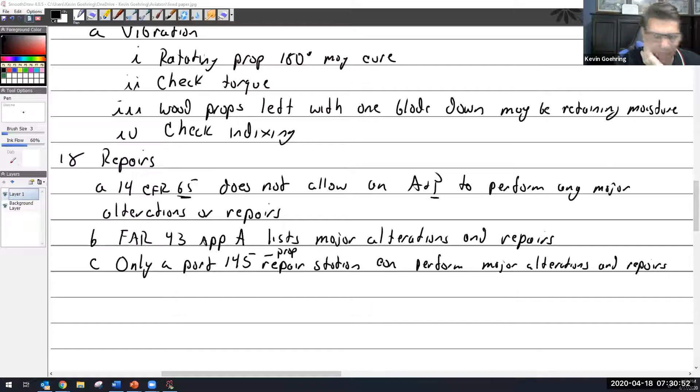Let's see. Oh, so only a Part 145 prop repair station can perform major alterations and repairs to props. I think these are some of the Q&A questions that'll help you out.

So wash props. Wash the prop with fresh water after salt spray exposure. Wash prop with fresh water after salt spray exposure. That's if you're buzzing people on the beach or happen to have a seaplane. Wash with mild soap and water before inspection.

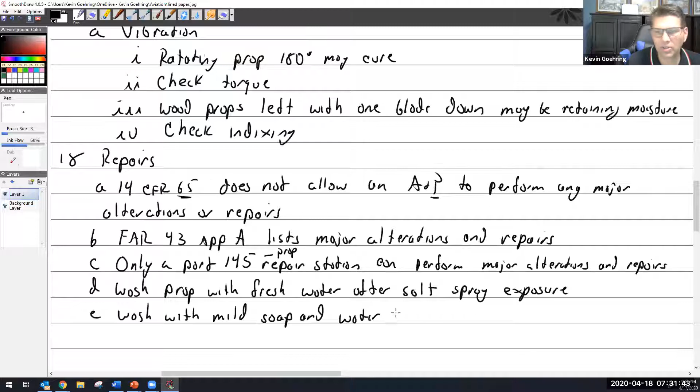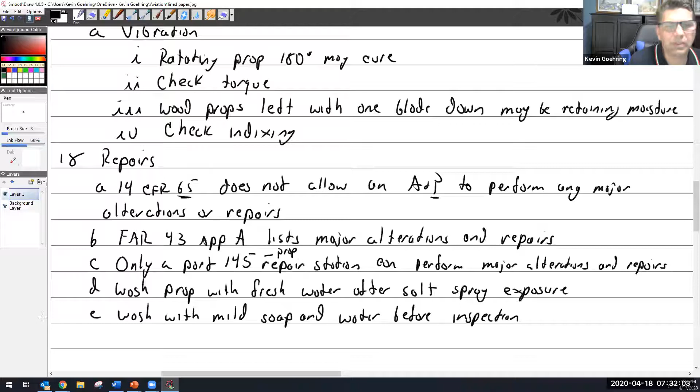I don't want to get too crazy here with my notes, which I did when I wrote them. So sometimes I spend longer trying to figure out what not to say rather than just saying it. Oh, I should have said that.

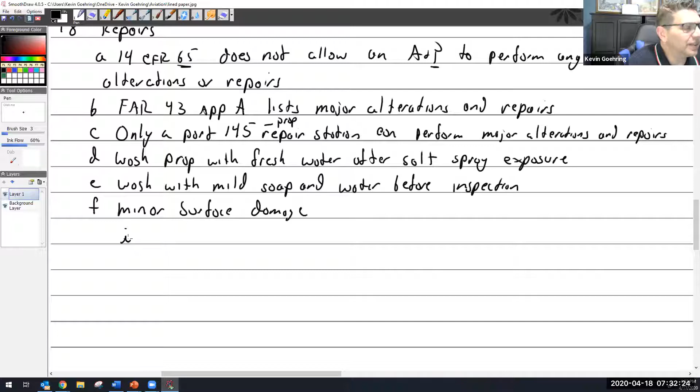So minor surface damage, minor surface. All right, so what is common with propellers is the leading edge of them gets pitted, you know, from bugs and all kind of rain and little tiny rocks and stuff like that. So it's actually considered rather normal and routine maintenance for A&Ps to take a small file and redress the entire leading edge, file the whole leading edge. You have to be careful not to change the profile, but you're allowed to do that. And then take some sandpaper and polish it and then repaint it.

Funny thing, you'll see a lot of airplanes out there that have really beautifully polished propellers. And a couple of years ago, it just seemed like that was the big thing. The FAA was coming after everybody who had a polished prop. Apparently, there's only one propeller in existence, and I don't know which one that is, that actually has in its repair manual that you can polish it. All other repair manuals clearly state to paint the propeller after the repair. So you have to have them painted. You're not supposed to have them polished. So just keep that in mind.

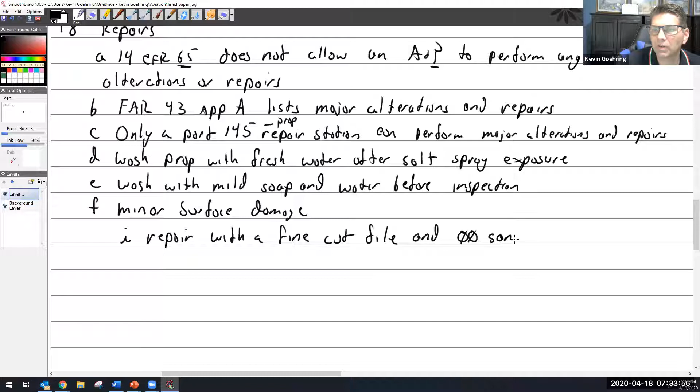Repair minor surface damage, repair with a fine cut file. Let me see, repair with a fine cut file, and double aught sandpaper or crocus cloth. Double aught sandpaper or crocus cloth.

What's a crocus cloth? I knew somebody was going to ask that. It's like sandpaper. What's the difference between sandpaper and crocus cloth? It's got to do with the abrasives that they use on it. And offhand, I don't remember what it is. Just use some sandpaper.

What's that? Sorry, Kev. I was going to say, how do you spell crocus cloth? Crocus, C-R-O-C-U-S. Thank you. I thought you said Irocus. So I was like, what? No, crocus. C-R-O-C-U-S. Crocus.

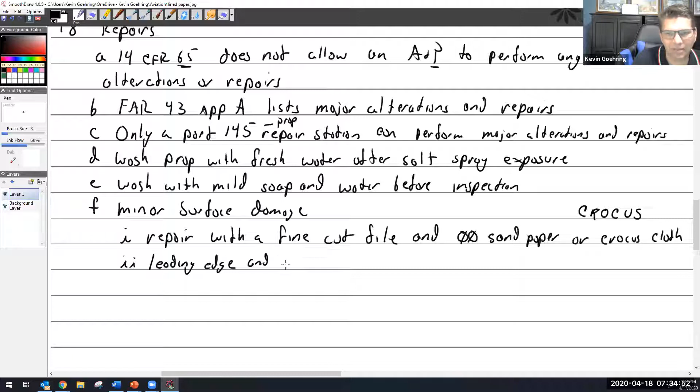Okay, leading and, not to as much of an extent, trailing edges often need to be dressed. That's what you call it, when you take a file and you go down the entire length of the blade and pull out those microscopic little imperfections, because those little microscopic imperfections, that's where your stress risers start. And that's where you're going to get a crack in your propeller.

Dress with the crocus cloth? Yep. Well, I take a file, I think I've done this to my prop almost every annual, especially if it needs a little touch-up paint anyway. So I'll take a file and just draw it down the entire length of the prop. And I use my little jeweler's files. I don't use a giant file and take off a bunch.

But then I'll just dress it all the way down, and I'm taking out the very minor little dents and scratches and nicks that are in the prop. They're almost microscopic. You can't see them. But if you take your fingernail and run it across there, you can feel that it's not real smooth. And so then I'll smooth it all out and then do a sand, and then I'll paint it.

No repairs. So let me see. MJ says, so filing and redressing is not a major alteration or repair? No, it's definitely not an alteration, and it's not a major repair. It's minor. So no repairs are allowed in the shank. No repairs are allowed in the shank, in the shank of adjustable prop blades.

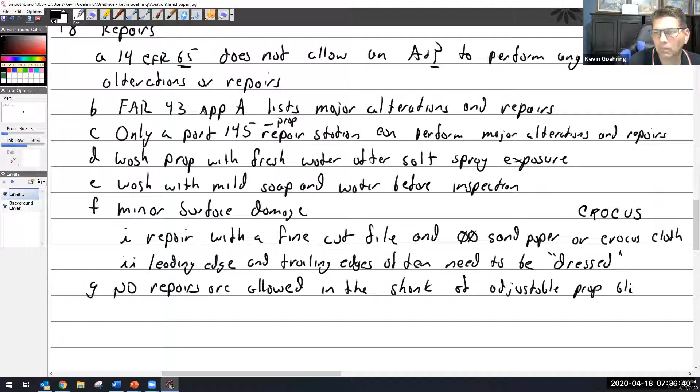I'm not sure how I feel about this statement, but transverse cracks, which is across the blade, are usually cause for rejection. All right, outside of composite blades, I don't know of any cracks that aren't cause for rejection. They are. You have a cracked blade, I'm sorry, that thing's coming off. And I think there's some Q&As about this, prop bolt holes.

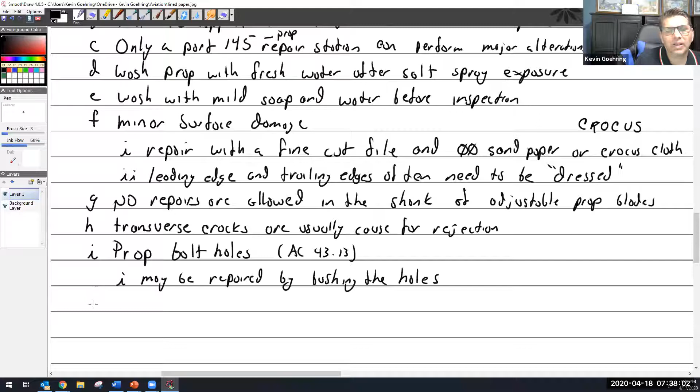They can be repaired according to AC 43.13, which again is acceptable methods, practices, and techniques. So prop bolt holes can be repaired. May be repaired by bushing the holes. And sadly, if that's happening, it's usually on account of bad maintenance. May be repaired by bushing the holes, or using 1/16 inch larger bolts.

And then this last statement is bolt hole repairs to wood props are not allowed. So bolt hole repairs to wood props is not allowed. Okay, I'm gonna tell you right now, I'm not doing any of this. Hey, no way, no how.

So when I think this through, if I've had a propeller that somehow has damaged bolt holes where the prop mounts to the flange, and either the bushings from the flange go into the prop, or it's just prop bolts in general. And I think, okay, AC 43.13 says if those holes are bad, then I can just drill out the prop, bush the holes. No way am I doing that. Or two, maybe drilling the holes out a little bit bigger and using a 16th inch larger bolt.

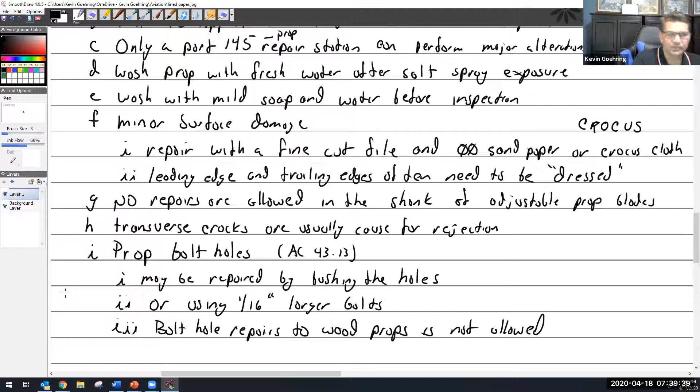Well, that means I got to also do that to the flange of the crankshaft, and that is not approved. So I don't know. Well, it says that. I'm being really cautious about that one. There's too much liability. It's too much liability. I don't know. Some of this is kind of weird.

You're allowed to. It's something you can send out to have done, and this is actually pretty common. Shortening blades, but it stands to reason if you shorten one blade, shorten the other side, and that's actually kind of a common occurrence. That is a major repair. Might even be an alteration.

And the reason why it's done is if you damage the blade, you get a bad enough rock chip, a crack happens, then rather than throw away the whole propeller, you actually shorten the blade if you're allowed to. You just got to make sure you do the other side too.

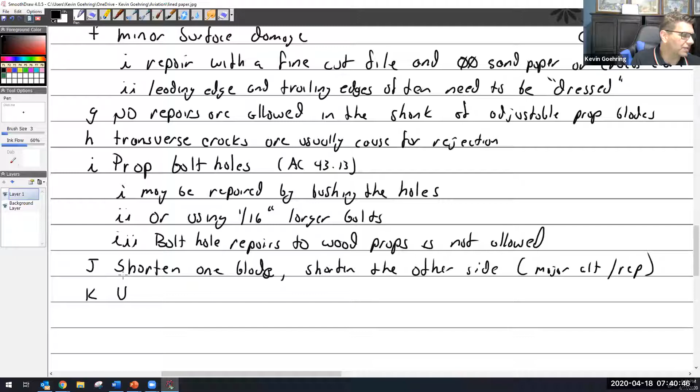Something that it's sad, and it shouldn't be this way, but it's overlooked. And as mechanics, we should be doing this all of the time. In my shop, every time something came in for an annual, it was one of the things that we addressed and would write down as either a discrepancy, airworthy or a discrepancy. We highly recommend it. And that was repainting of props. They're expensive and you want to protect them, and it's the paint that protects them.

And so especially the back, which is the face, especially the face where the flat black is, the flat black is not a very robust paint. The front, you can buy propeller epoxy paint in a can from Tempest, I think is a brand name. They make it, and we've got it even in the tool room at school. But the back is usually just a flat black. And so it's a lacquer or something. It doesn't last very long.

So it's almost a good idea annually to sand down the back of the blade with a little bit of sandpaper and just give it a coat or two of black paint, and then fix anything on the prop that is missing some paint. But use caution. I say paint often, but use caution when adding finish, which is either paint or varnish, to prevent imbalance.

Yes, Stephen. I've noticed on a lot of props, it's not black on the back, but it's like a metallic gray. Well, when you say the back, you mean the face or the back? The face. So the part facing the users, which is the face, which is the back. So the part the pilot sees? Yes, the face. Sorry, now you got me going. So yes, the part the pilot sees, which is the face. It's supposed to be flat black. It's the only approved color I'm aware of.

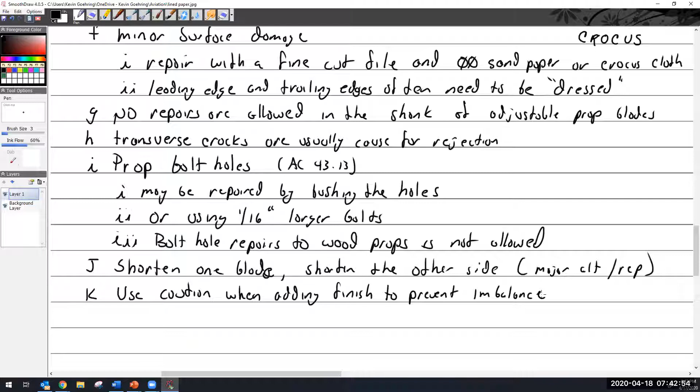Hey, Kevin. When you do the face, did you have to mask the other side? I do, yeah. First of all, I don't want to get flat black all over my airplane, so I put blankets and stuff on the cowling, take off the spinner, and then yes, I do mask it off, so I don't get the flat black onto the back of the prop, which is the rounded part.

And I kind of already said this: polish out scratches with fine sandpaper.

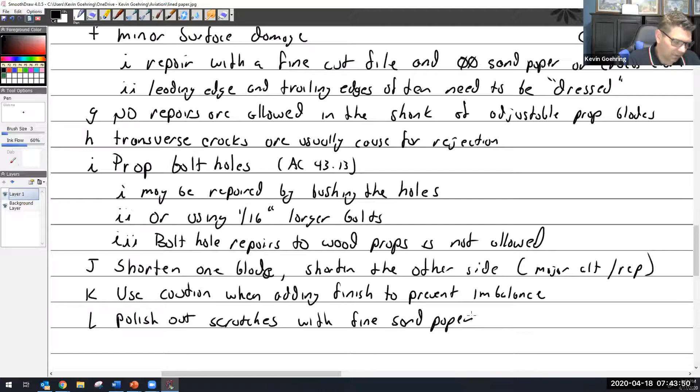All right, I'm going to make this one either very, very simple or very, very complicated. So I have an entire page here that I'm not going to go over, but I'm going to say repair of rock chips, damage, scratches. And so I had this entire thing here, which came out of AC 43.13. Let me see.

Actually, it dealt with bent blades and all kinds of stuff with that, and what the limits are. And it got crazy. Sometimes I think that a little bit of knowledge is great, so I'll just go with it. So I got into this slide and I explained how to use it, where you can repair the blades, what the bend radius is if a blade got bent, how you can fix it, and what station it could be. And I explained all how to use this.

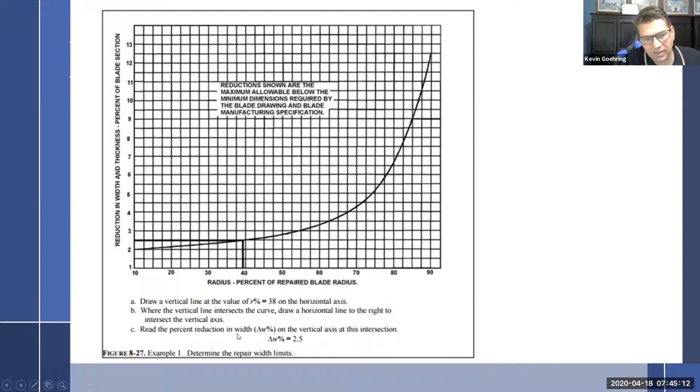And that goes on for a page and a half. And I decided, you know what? I'm not going to do that anymore because it's ridiculous. If you have a bent blade, my gosh, don't be trying to straighten it. That's something a repair station should be doing. So I'm not going to do that. And I'm assuming if you work at one of those repair stations, they're going to train you how to do it.

Secondly, I'm going to bet you a large lunch at a drive-through, supersize included, that they're not using AC 43.13 to do any of this. They are using the actual repair manuals from the manufacturer. So I'm just going to say this: use the correct manual. Actually, it's repair. I shouldn't even say rock chips. It was all about bending and all kinds of stuff. But rock chips is something we do as mechanics. So repair rock chips, use the correct manual.

Some manuals have one thing, some have another. In my notes, I wrote a quick note about repair dimensions. You have a blade, and you have a rock chip. Of course, this is magnified 100,000 times. You're going to find out that you have to measure the width of this, measure the width of that.

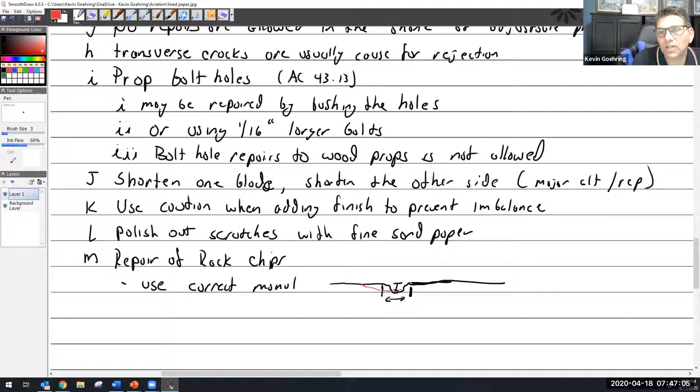And then based upon the depth, width and depth, you're going to figure out the ratio of the repair. There's an actual ratio of repair that tells you when it's done, it has to be like that. The reason is you can't take a propeller blade that has had damage like that and say, okay, we know we don't want a stress riser, and everything has to be nice and smooth, therefore you smooth it out and it looks like this, right?

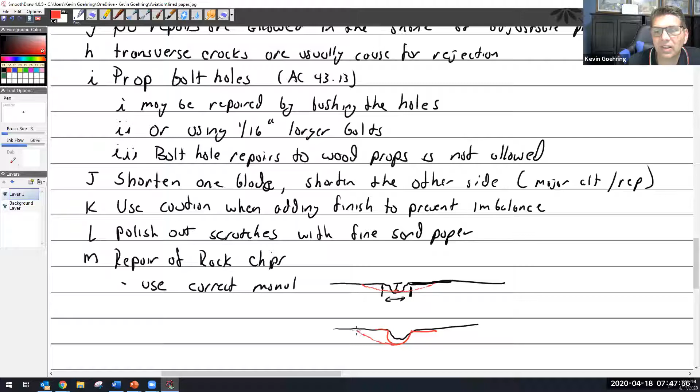Yes, you have smoothed it out, but if you use a chainsaw file and just saw down in there like it's a hole, that's not really relieving the stress. It's concentrating it back in a little bit wider area, granted, but that is so different than a repair done out here like that, which gradually lets the stress transfer through, and then you're not going to develop a crack. I believe the ratio is 1 to 10, but I'll let you look that up, because it's different for every propeller manufacturer. So I'm gonna let that one go.

Actually, I was thinking we could look it up. Let's see, what book do I have? Here we go. Just out of curiosity, we call it 43.13. Always good to teach on the fly like this, right? Corrosion, bolts, nuts, exhaust, hydraulic. Repair of metal props is 8-29. Let me see.

Most everything I've got for you has come out of 43.13. And my memory is they actually don't give you a ratio right here. I think that ratio comes out of the Sensenich book. And looking at 43.13, it doesn't actually give you anything about that. It almost leaves it up to you to use your best judgment. So let me see.

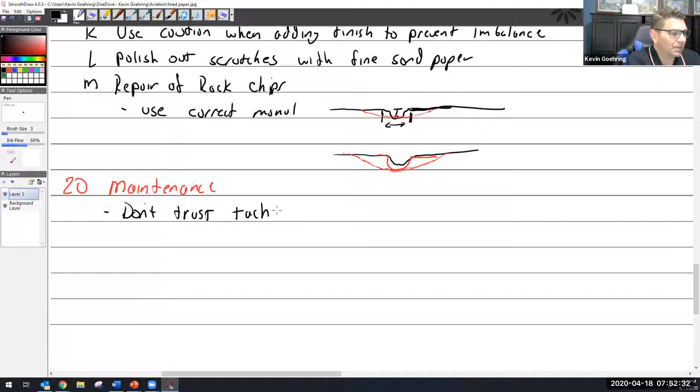I talked about checking the torque on wood props a lot. Yeah, here it is. The torque for the bolts on that was 140 inch-pounds. Not very much. You said those had a castellated nut with a cotter pin? They sure do. So then you have a torque range. What would your torque range be? I don't remember what it was exactly.

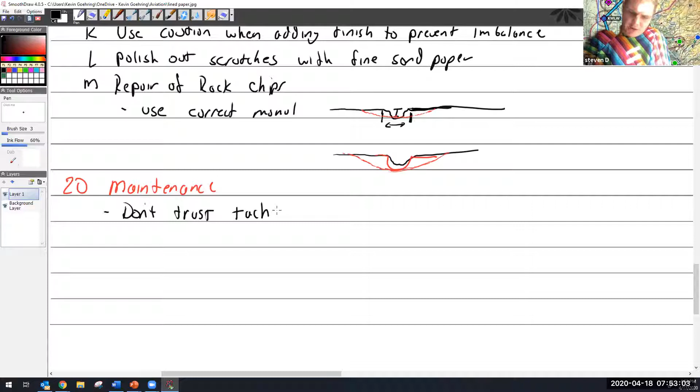Kevin, I have a question on a synthetic prop, like the MT, where it's the German ash wood on the inside. Yep. How would you dress the edge on that? Would you also, because it's like fiberglass? Don't. It's about metal props. Dressing metal props. Don't be dressing wood props and stuff. That's bad.

Yeah, I just kind of go into great detail on maintenance. Inspect for cracks, chips, dents with a 4 power magnifying glass. Dress out all chips, nicks, gouges. This is just redundant stuff here. Polish with fine sandpaper. Follow manufacturer's recommendations. Repaint when missing. I think we got it.

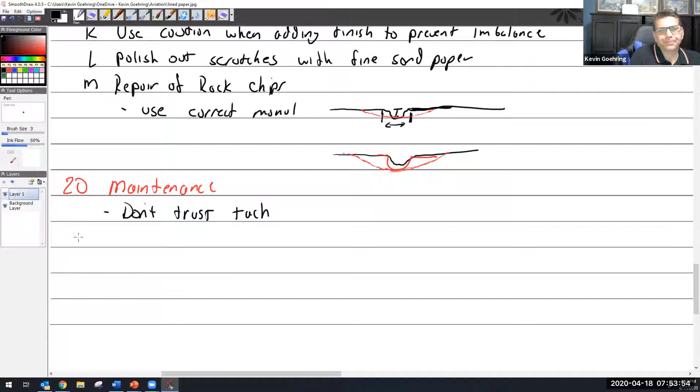I'm not going to talk much about balance. I normally do, but Larry, I believe it's Larry Johnson, he covers prop balancing in pretty great detail. In fact, we're pretty fortunate that I believe we just bought a brand new prop balancer, a dynamic balancer. So there's a difference between static and dynamic balancing. Static balancing is not that. Static, nope, go back.

Yeah. Okay. Static balancing is when you take a prop off and you put it on a balancer. And we actually have one of these in the shop, in the NDT lab. I took it and moved it so I could put our new Magnaflux in there, but it's back now. And what you do is you put your prop onto these arbors and you put it on a balancing machine that is perfectly level, and you do a vertical check and a horizontal balance check.

So the vertical check, if it stays vertical, it's vertically balanced. For horizontal, you put it horizontal. If it's perfectly balanced horizontally, it stays horizontal. So a prop that is out of vertical balance will not stay vertical, and a prop that is out of horizontal balance will not stay horizontal. You can write that down.

I'm not going to. And what that means, so if I put it right here, this one's more obvious. If this blade is heavier, this blade's going to roll down because it's free to roll. You're going to say, well, that blade's heavier, so you have to add some weight to this blade. And how you add weight to blades depends on what kind of prop it is.

Wood props, they can actually add some solder to some of the metal tipping. On some props, you can actually have little spots where, and I'll show you a little bit later, where you can put lead wool inside of hollow bolts. They're hollow on purpose for that very reason. Some of them have little attach points on the hub, little screw holes where you can put a little plate. Some of them you can add washers.

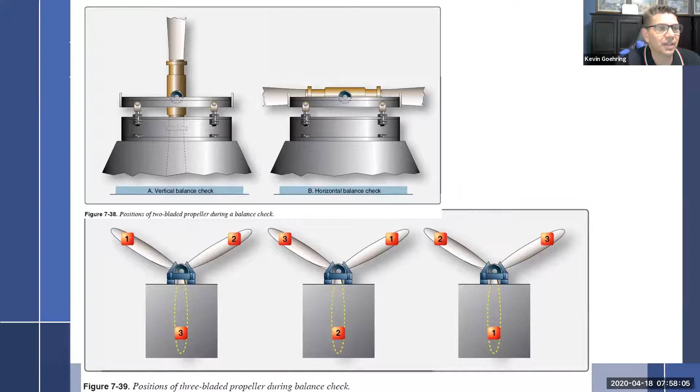And that's what I'm talking about, that a prop that is statically balanced like this, you should be able to reinstall it any which way and it won't matter. But an aircraft that has a dynamic balance, that is set to the engine, and you always have to make sure you put it back on exactly the right way with the number 1 blade facing the way it was balanced, so you don't throw it out of balance. So that's that.

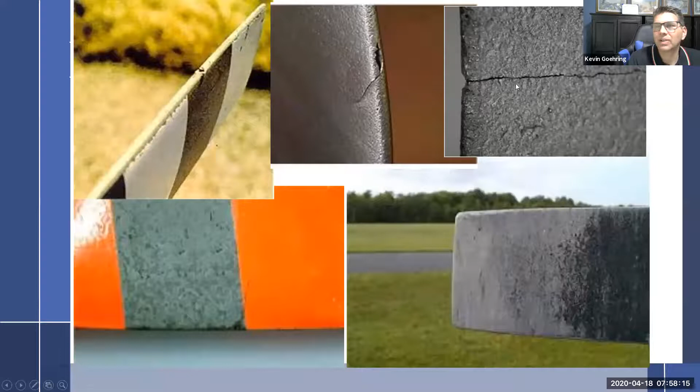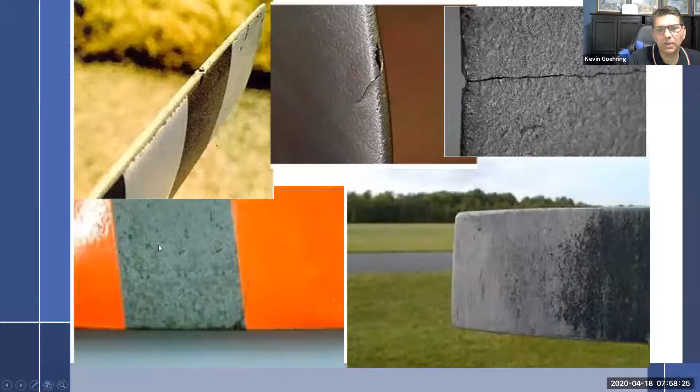Let's see. Oh, common problems. This is clearly cause for rejection. I think this is the same blade over. This is just pathetic here. What I'm seeing is really nice paint, but nothing in the middle. Here we have the face, and this is what aircraft blades usually look like: it was flat black at one point, but you have all of this not painted. So not only is that bad for the pilot as far as flicker vertigo goes, but it's also terrible for the prop because it's going to start corroding. And they're hard to find. It's not even a price thing anymore, but props are stupid expensive.

No. All right. Let me think. Is that about it for this section? There we go. Let me see. Covered balance, horizontal balance, dynamic balance. Yeah, there we go. I think we're good. Cut out some of the fluff. All right. How about, let's see.

This look familiar to anybody? Who put it through the cheese grater? All right. One of my favorite things. So let me make sure we're good to go. Let me see. Share my computer sound. Next one. Just load up.

I'm sorry, you guys know what's happening, right? I forget. So. No idea. Okay. You know Mythbusters, right?

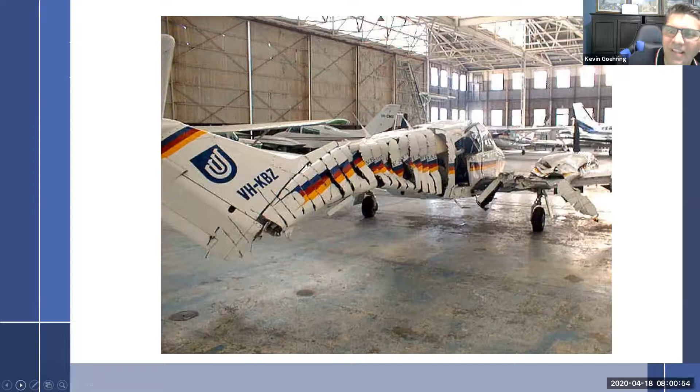Okay, so what Mythbusters did is somebody sent them in this picture. And what is said is this was done by another aircraft running alongside of it. And so these are the propeller marks as it went through there, and then it finally came to rest here. So the myth is, did that really happen? And this clip that I found online years ago starts kind of in a bad spot, but it's the final test. So if you're not familiar with Mythbusters, let me know in the chat. I'm interested in your sheltered life. So Mythbusters are going to prove or disprove that this happened from a running airplane hitting it, if it was real. So that's what they're doing.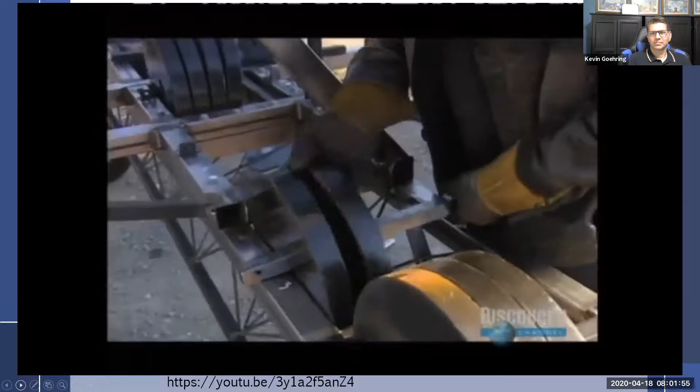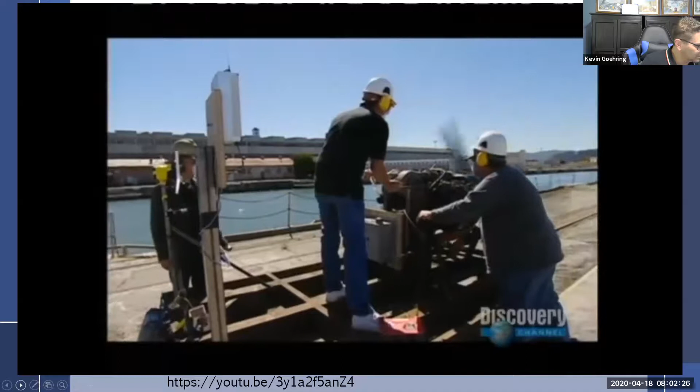That our runaway plane doesn't run away. Joe Rakow is an aerospace specialist who studied the aftermath of thousands of air disasters. Now he's helping cause one. What we're looking at after impact is that the entire mass could slide as far as 20 feet, and pieces of the fuselage or propeller could, in theory, fly on the order of miles given the energy they have at impact. That's a pretty sound argument for being a long way away. A bunker is erected on the other side of the dry dock. We're nearing departure. Propeller and plane are lined up. Time for a pilot run. We only have one shot at this. For the rehearsal, they're going to keep the engine on a long leash, just in case. There seems to be a short in the kill switch circuit.

Can anybody identify that engine? Super students. It was a 6-cylinder turbocharged. Was it a TIO 540? Damn, good for you, man. TIO 540. It's a Lycoming, just painted the wrong color. Okay, cool.

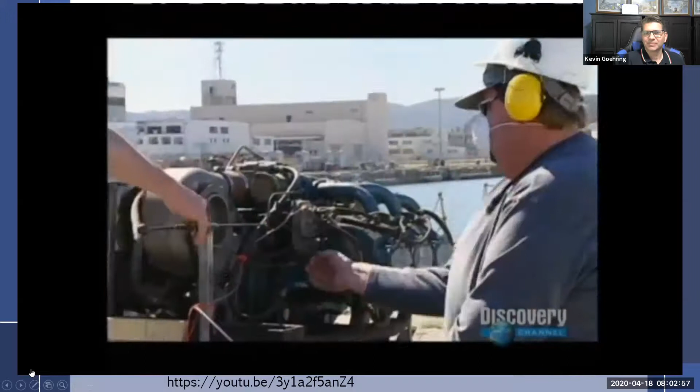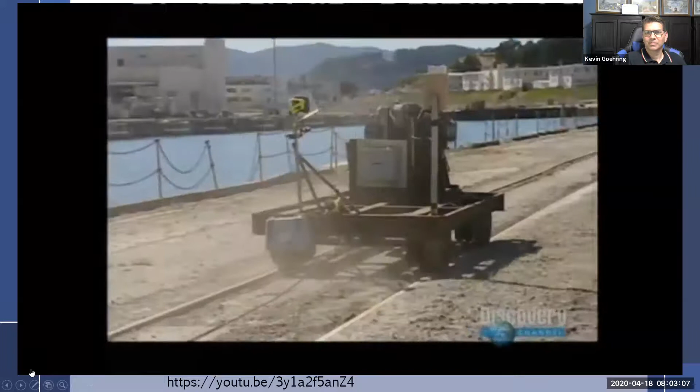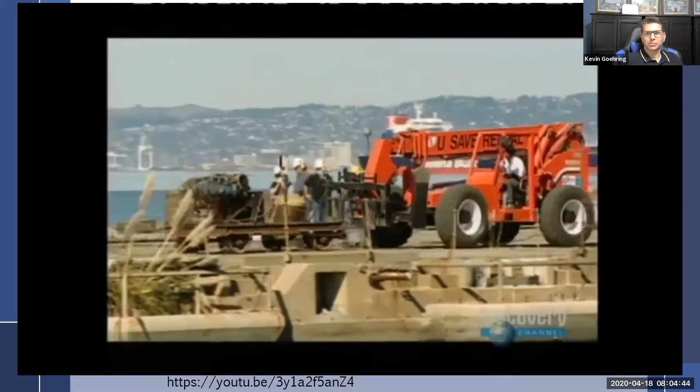The engine starts taxiing, reaching a dizzying 9 miles per hour. Remember, they're aiming for around 30 miles per hour. Go ahead and kill the engine. That worked beautifully. This engine is leaking at every possible seal. Captain Earl and co-pilot Brian goose up the throttle. This time, a runaway success. It's going to be like a freight train. It's crunch time. Literally. Welcome aboard Mythbusters Flight 101 to Shred City. Now that is a shredded plane. The high-speed camera shows the prop blade slicing through the fuselage as though it was made of cardboard. That's exactly the slice pattern we see in the picture. It's vertical slices from the blade.